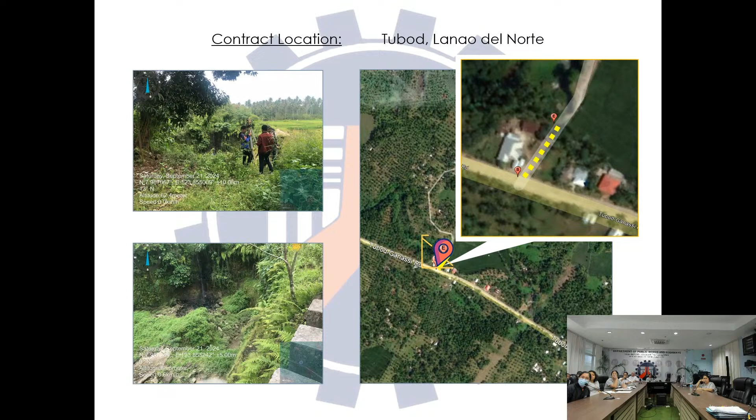Thank you. Let us start with contract ID 25KG0018 with contract title Construction of Dike Protection, Maliwag-Pinpin CIS, Tubod, Lanao del Norte. This is the location map of the project and some of the geotag pictures taken during the site validation and survey. For the project description, we have construction of protection dike, a total of 182 calendar days project duration, physical target length of 50 linear meters.

The description of works to be done are the facilities for the engineers, which includes construction of field office for the engineer with monoblock chair and office table. Other general requirements include project billboard or signboard, occupational safety and health program, mobilization, demobilization, detour, and access road.

We have earthworks, which includes boulder fill, clearing and grubbing, individual removal of 100 mm to 300 mm diameter trees, unsuitable excavation, embankment from structure excavation, embankment from borrow, and aggregate subbase course 200 millimeters thick.

We have reinforced concrete that includes 3,000 psi Class A 14 days curing structural concrete, lean concrete, and grade 40 deformed reinforcing steel. We have bank and slope protection works that includes stone masonry and gabions, and drainage works that includes 910 millimeters diameter Class 2 reinforced concrete pipe culverts and rectangular flap gate.

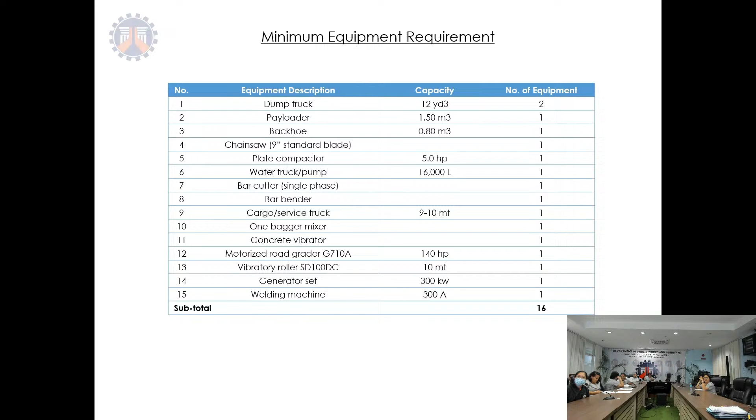These are the minimum equipment requirements for the project. The approved budget for the contract is 14,700,000 pesos. Next would be contract ID 25KG0019 with contract title Construction of Protection Dike, Balut CIS, Balo-i, Lanao del Norte. And these are some of the geotag pictures taken and the location map of the project in Balo-i, Lanao del Norte.

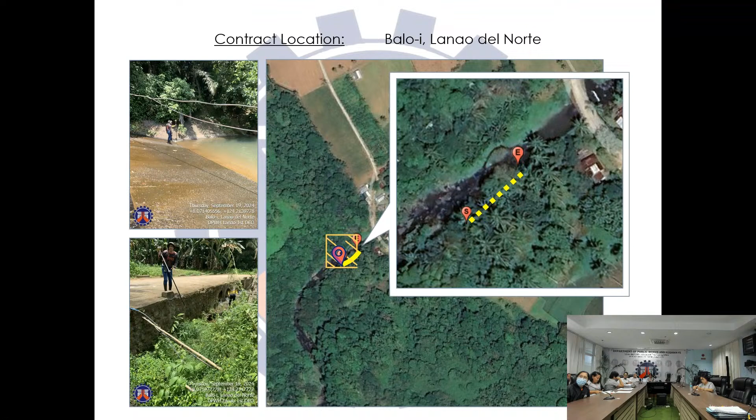For the project description, we have construction of protection dike and a total of 179 calendar days project duration, and physical target length of 205 linear meters. The description of works to be done are the facilities for the engineer, which includes construction of field office for the engineer with monoblock chair and office table. Other general requirements include project billboard or signboard, OSH program, mobilization, demobilization, and detour or access road.

We also have earthworks that include structure excavation of soft rock, clearing and grubbing, individual removal of 150 mm to 300 mm diameter trees, unsuitable excavation, and embankment from borrow. We also have reinforced concrete including 3,000 psi Class A 14 days curing of structural concrete. We also have lean concrete and grade 40 deformed reinforcing steel bars.

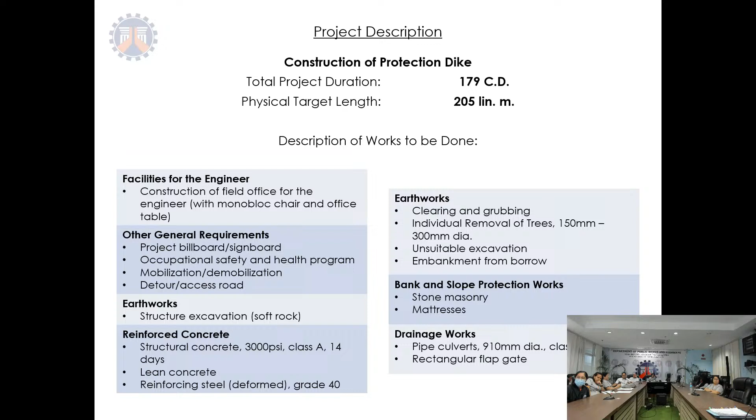And bank and slope protection works that includes masonry and mattresses. And for drainage works, we have 910 millimeters diameter Class 2 RCPC and rectangular flap gate. These are the minimum equipment requirements for the project. The ABC or the approved budget for the contract is 14,700,000 pesos.

Next is contract ID 25KG0020 with contract title Construction of Flood Mitigation Structure along Sagadan Bridge with bridge ID number B00961MN Package 1, Tubod, Lanao del Norte. And this is the location map of the project in Tubod.

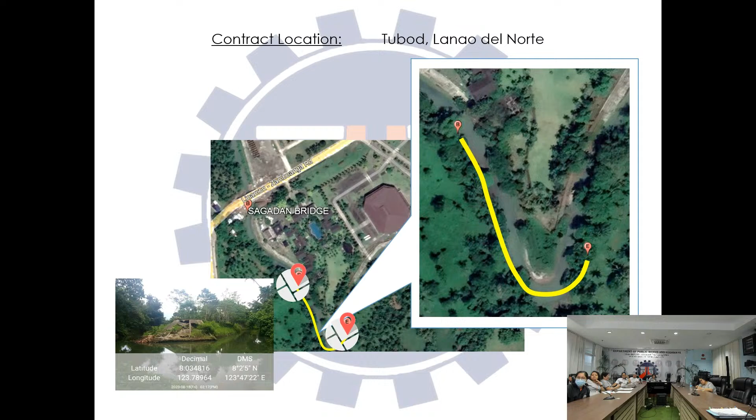For the project description, we have a construction of flood mitigation structure with steel sheet piles. Total project duration is 245 calendar days and physical target length of 240 linear meters. The description of works to be done are as follows.

Facilities for the engineer, which includes construction of field office for the engineer with monoblock chair and office table. Other general requirements that includes project billboard or signboard, OSH program, mobilization or demobilization, and detour or access road.

For earthworks, we have removal of structures and obstruction, gravel fill, clearing and grubbing, removal of 150 mm to 300 mm diameter trees, surplus common excavation, embankment from structure excavation, and aggregate subbase course 200 millimeters thick.

We also have reinforced concrete, and under reinforced concrete, we have 3,000 psi Class A 14 days curing structural concrete, lean concrete, and grade 40 deformed reinforcing steel. For bank and slope protection works, we have grouted riprap, furnished and driven of steel sheet pile U type.

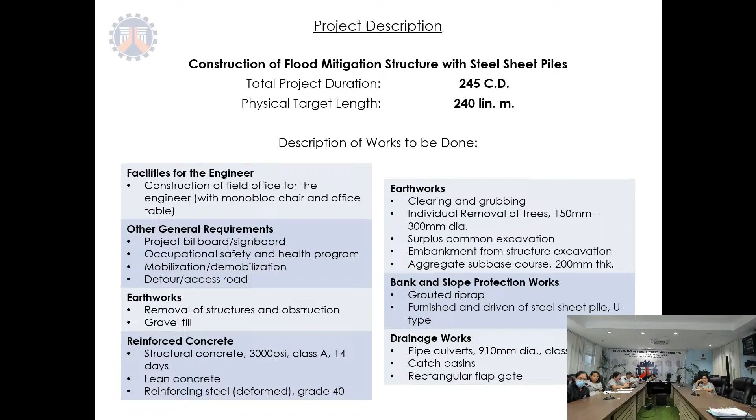And lastly, for the drainage works, we have 910 millimeter diameter Class 2 RCPC, catch basins, and rectangular flap gate. These are the minimum equipment requirement for the project. The approved budget for the contract is 49 million pesos.

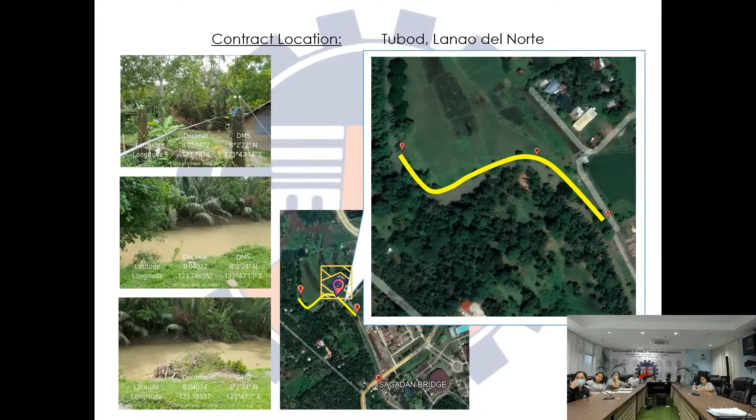Next would be contract ID 25KG0021 with contract title Construction of Flood Mitigation Structure along Sagadan Bridge with bridge ID number B00960 Package 2 Tubod, Lanao del Norte. This is the location map in Tubod, Lanao del Norte and some of the geotag pictures taken during site validation and survey.

For the project description, we have construction of flood mitigation structure with steel sheet piles. Total project duration of 245 calendar days and physical target length of 240 linear meters.

The description of works to be done are the facilities for the engineer, which includes construction of field office for the engineer with monoblock chair and office table, provision of 4x4 pickup type service vehicle for the engineer on rental basis, operational and maintenance of 4x4 pickup type service vehicle for the engineer.

We also have other general requirements that includes project billboard or signboard, OSH program, mobilization or demobilization, detour or access road. We have earthworks that includes removal of structures and obstruction, gravel fill, clearing and grubbing, individual removal of 150 mm to 300 mm diameter trees, surplus common excavation, embankment from structure excavation, aggregate subbase course, 200 millimeters thick.

We also have bank and slope protection works that includes grouted riprap, furnished and driven of U-type steel sheet pile, reinforced concrete, which includes 3,000 psi Class A 14 days curing structural concrete. We also have lean concrete and grade 40 deformed reinforcing steel.

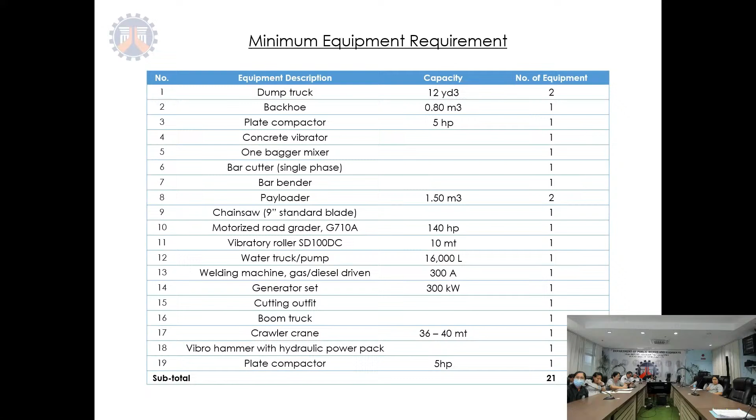And lastly, for the drainage works, we have 900 millimeters diameter Class 2 reinforced concrete pipe culverts, catch basins, and rectangular flap gate. These are the minimum equipment requirement for the project. The ABC or the approved budget for the contract is 63,361,715 pesos.

Contract ID 25KG0022 with contract title Construction of PNP-Perimeter Road, Tubod, Lanao del Norte. This is the location map and the geotag pictures taken during the survey.

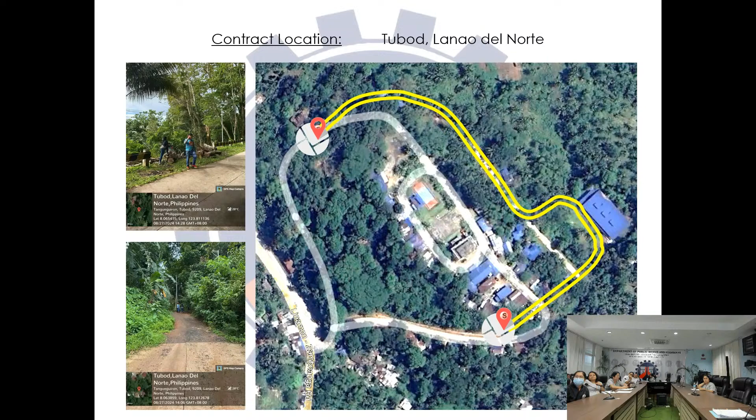For the project description, we have construction of 230 millimeters thick road, PCCP with slope protection and lined canal. A total of 165 calendar days project duration and with physical target of 0.72 lane kilometers and 1,530 square meters. The description of works to be done are the facilities for the engineer, which includes construction of field office for the engineer with monobloc chair and office table.

Other general requirements, including project billboard or signboard, OSH program, traffic management, and mobilization, demobilization. We also have earthworks, including clearing and grubbing, individual removal of 150 mm to 300 mm diameter small trees, removal of structures and obstruction, removal of actual structures or obstruction, 0.20 meters thick PCCP that are unreinforced,

surplus common excavation, common soil structure excavation, foundation fill, common soil embankment from roadway excavation, and common material subgrade preparation. We also have sub-base and base course that includes aggregate sub-base course 200 mm thick. We also have surface course, unreinforced PCCP 0.15 meters thick, 14 days curing, and unreinforced PCCP 0.23 meters thick, 14 days curing.

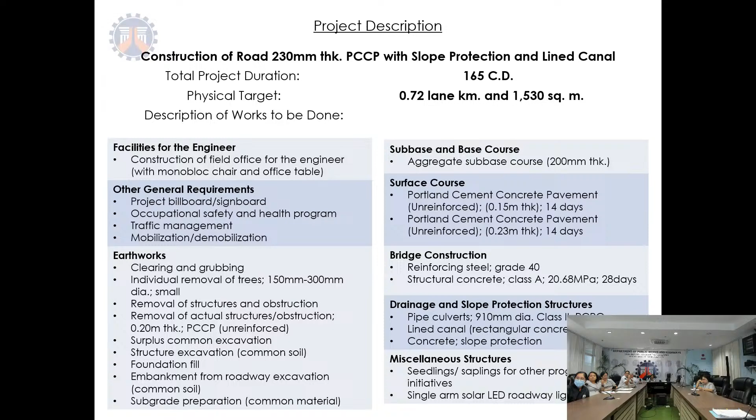And lastly, for the miscellaneous structures, we have seedlings or saplings for other programs or initiatives, and single arm solar LED roadway lighting. These are the minimum equipment requirement for the project. The approved budget for the contract is 29,400,000 pesos.

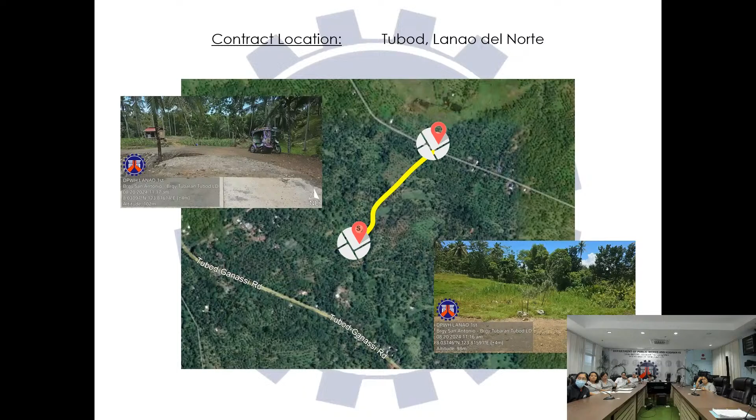Next, contract ID 25KG0023 with contract title Construction of Road, Barangay San Antonio to Tubaran, Tubod, Lanao del Norte. This is the location map of the project in Tubod, Lanao. For the project description, we have construction of road, 230 millimeters thick PCCP with slope protection, and a total of 210 calendar days project duration and physical target of 1.92 lane kilometer and 750

square meter. The description of works to be done are the facilities for the engineer that includes construction of field office for the engineer with monobloc chair and office table. Other general requirements, which includes project billboard or signboard, OSH program, traffic management, mobilization, demobilization.

We also have earthworks that includes clearing and grubbing, individual removal of trees, 150 mm to 300 mm diameter, small trees. Surplus common excavation, common soil structure excavation, foundation fill, common soil embankment from roadway excavation, and common material subgrade preparation. We also have sub-base and base course, which includes aggregate sub-base course.

For the surface course, we have unreinforced PCCP 150 mm thick 14 days curing and unreinforced PCCP 0.23 meters thick 14 days curing. Pay items under bridge construction includes grade 40 reinforcing steel, Class A 20.68 megapascal structural concrete 28 days curing, and Class B 16.5 megapascal lean concrete. Drainage and slope protection structures. We have pipe culverts 910 millimeters diameter Class 2, rectangular concrete lined canal, Class A grouted riprap.

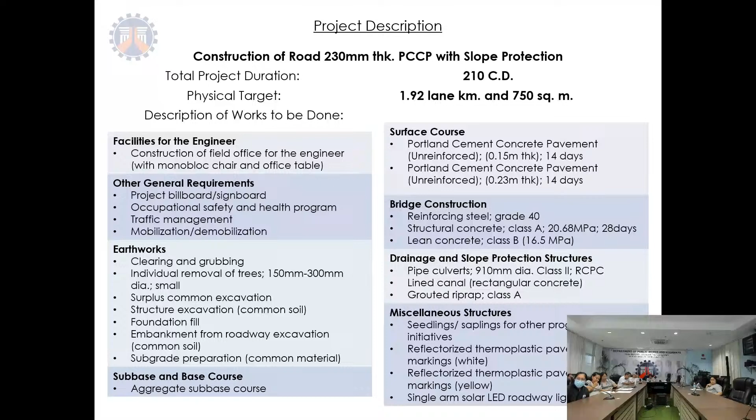For the miscellaneous structures, we have seedlings or saplings for other programs or initiatives, reflectorized thermoplastic pavement markings, color white, reflectorized thermoplastic pavement markings, color yellow, and lastly, single-arm solar LED roadway lighting. These are the minimum equipment requirement for the project. The ABC or the approved budget for the contract is 47,618,200 pesos.

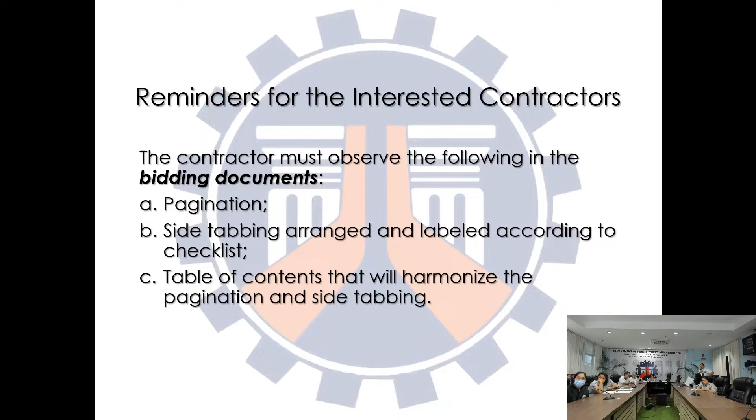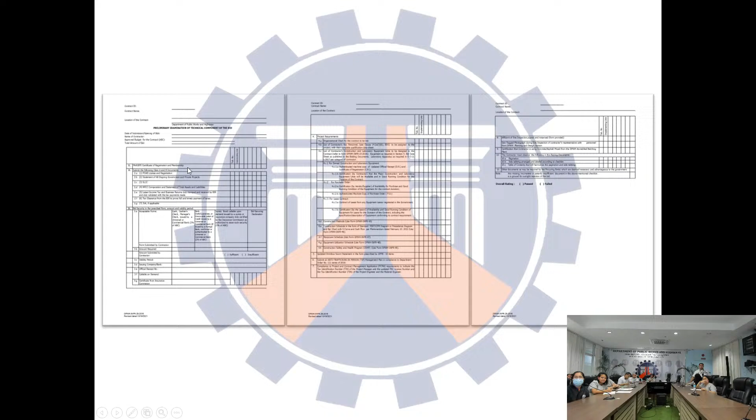Reminders for the interested contractors, the contractor must observe the following in the bidding documents: pagination, side tabbing arranged and labeled according to checklist, and table of contents that will harmonize the pagination and side tabbing. You may refer to this checklist for the preliminary examination of technical component of the bid and the preliminary examination of financial component of the bid. Thank you very much. That would be all.

Thank you, Engineer Liao. So are there any, Engineer Efren, you have? Yes, thank you, Madam Chair. In addition, Madam Chair, just a gentle reminder, those who are interested and prospective bidders to always update and revisit our official website for possible supplemental bid bulletin. And for the site visit, we already posted a schedule with corresponding contact person for site inspection, Madam Chair. I think that's all. Thank you.

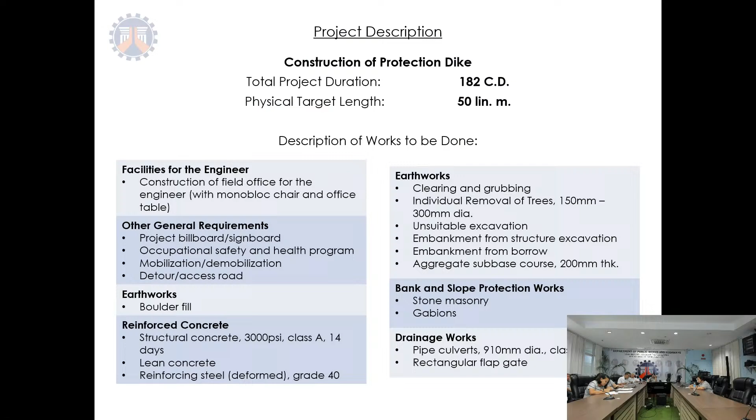Okay, thank you, Engineer Tulod. Ma'am Bibit, you have a concern? Please use the microphone, please. Can we see back 25KG0021, the flood mitigation? That construction, the description for the reinforced concrete. The structural concrete is not only 3,000 PSI, but I think that is 28 days. Then there is only 14 days for the reinforced concrete. Yes, Madam Chair, noted. We'll try to check on that. Okay, thank you. Thank you, Ma'am Bibit, Engineer Tulod.

For me, I have also an observation. Again, we have clearing, individual removal of trees. However, no item of works for replacement has been reflected again. So it is basically needed that if there is a removal of trees, you should automatically put a replacement, which is item 611, even if it is flood control. That is our mandate, even our joint memorandum with the DENR. In the previous pre-bid conference, I have also raised that concern. I hope it has already been corrected. But now here again, so I hope you will correct that, Mr. Planning. Yes, noted, Madam Chair.

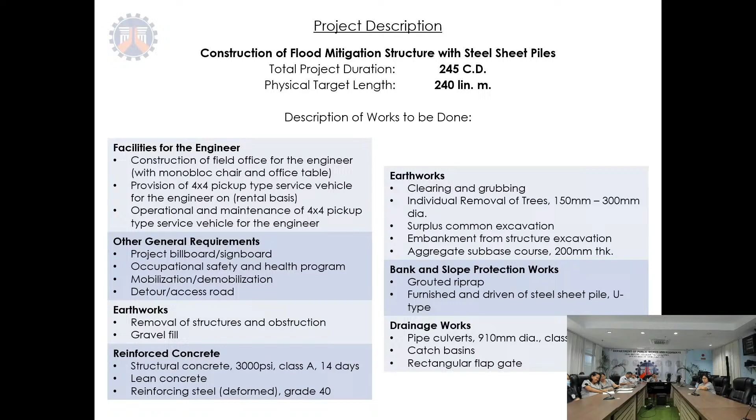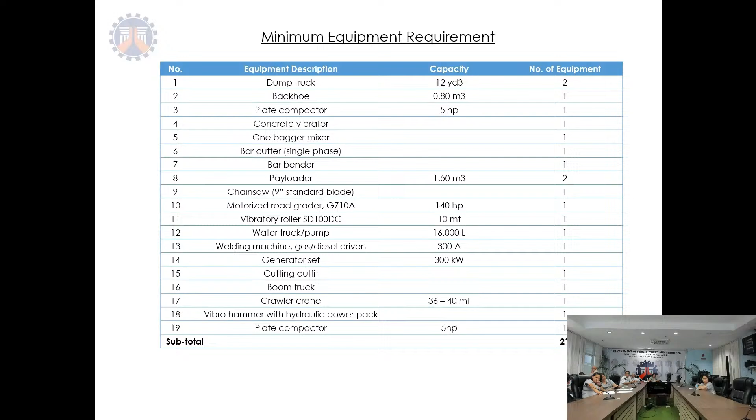So, other members, do you have any concern about these projects? Sir Admin? So about, I think it is Maliwanag. Maliwag or Maliwanag? Maliwanag. Yes. So I hope the initial findings on the actual situation were already reflected in your preparation of the program of works, Engineer Tulod. Okay, noted, Madam Chair. Okay, thank you. So, are there no other concerns about these projects?

So, what will be the pleasure of the members? Madam Chair, if there are no further queries and announcements, I move to adjourn the pre-bid conference. Okay, it has been moved and duly seconded. So the pre-bid conference this morning is hereby adjourned.